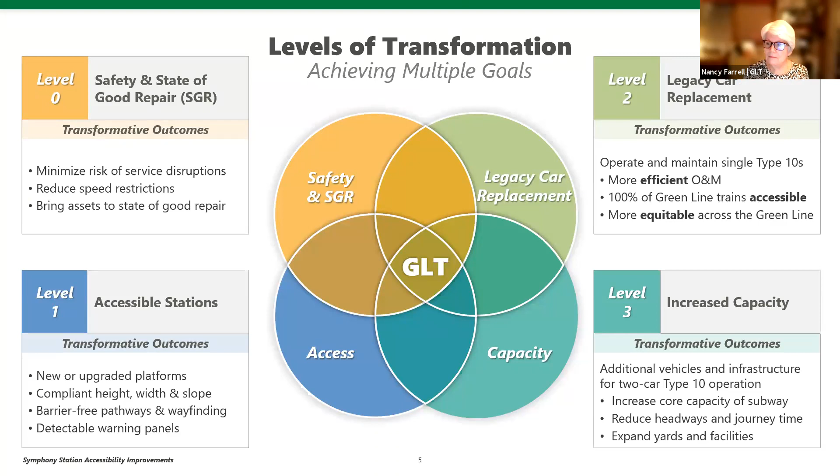On behalf of the entire Green Line Transformation team, I want to thank you for joining us tonight. I'm here with Desiree Patrice, Ben Friesen, and Andres Achury from the GLT senior staff and our project design team. And like Nancy said, we're very excited to share with you the 100% design plans for upgrading and modernizing Symphony Station to make it fully accessible.

The Symphony Station project will not only improve accessibility and safety for all riders, but will also improve the overall quality of service. From our engagement with stakeholders throughout the design process, we know the neighbors and community members around Symphony Station are eager to see this project executed. So before we get started with the project design, I would like to take a few minutes to highlight how the Symphony Station Accessibility Improvements Project advances the goals of the Green Line transformation.

Safety and state of good repair, accessibility, legacy car replacement, and increased capacity are the 4 key elements of the holistic objectives of the program. So you may be asking yourself where we are with each of these levels that I'm describing. It is important to note that the levels advance concurrently and are interrelated.

So let me give you an example. Much of the state of good repair and accessibility work that we are advancing right now will lay the foundation for a unified fleet of vehicles and increased capacity in the future. So this level is critical to safety and reliability for riders today and the years to come.

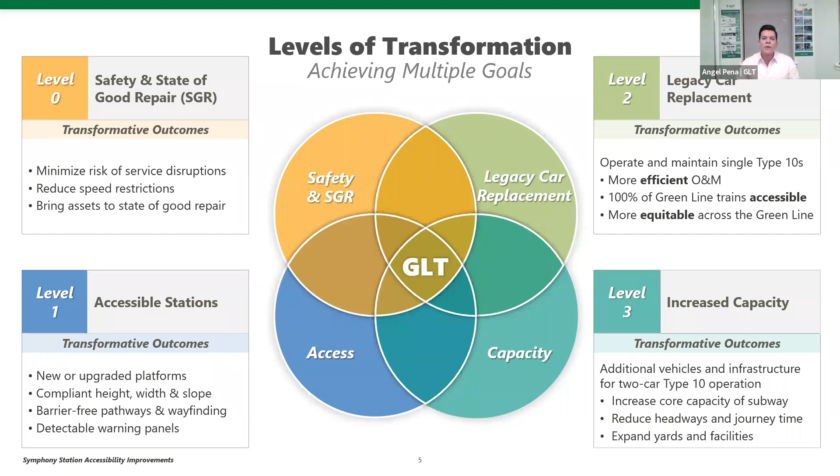So through our accelerated approach, we have delivered major improvements across all Green Line branches over the last 2 years. Some of those is that we have been able to renew 10 miles of track, which represents 20% of the entire Green Line system. We also have upgraded 18 intersections, replaced 20 units of special track work.

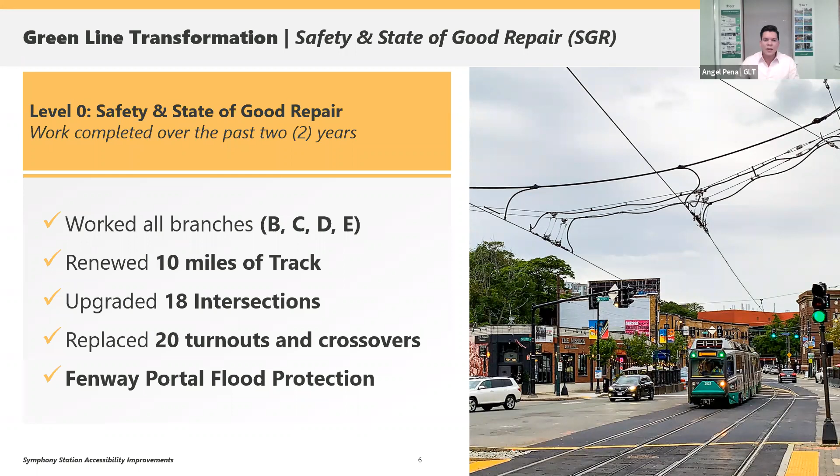And completed the Fenway Portal project to improve the resiliency on the D branch. So there's a lot of work in a short time frame. And these upgrades make the system safer, provides a smoother ride, and increase accessibility for pedestrians, cyclists, and riders of all abilities. But there's much more.

Beyond these state of good repair investments, we are focused today on making the system fully accessible. Over the next 5 years, we're making more than 20 Green Line stations accessible. That includes Symphony Station. Before I get you there, first, let me tell you some of those.

We have accelerated construction on the B branch consolidation, for example, by using the full access closure earlier this year. And now we are on track to open 2 new fully accessible stations by the end of this year, months ahead of schedule. At the same time, we're now working with the town of Brookline to reopen the new accessible Brookline Hills Station this winter as well.

So we're working on many also accessible designs for more to come. Some of that is Newton Highlands, Hynes, and the 4 remaining inaccessible stations on the D branch, which are Beaconsfield, Chestnut Hill, Eliot, and Waban, making the D branch the first fully accessible Green Line branch. So that's very exciting to us.

And we have many other exciting projects going on, but today we're here to discuss the fully funded Symphony Station. So let's learn more about it with the team.

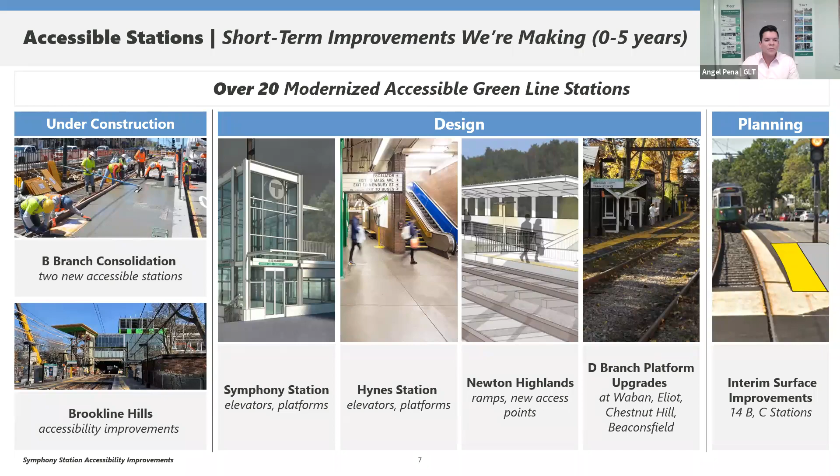Symphony Station is the last underground station before the E branch transitions to surface level and sits below the busy intersection of Massachusetts Avenue and Huntington Avenue in Boston. The station was constructed in the 1940s, and the station's platforms are separated by the Huntington Avenue underpass. The station currently lacks 2 major elements of an accessible step-free journey: elevator access and raised platforms for accessible boarding.

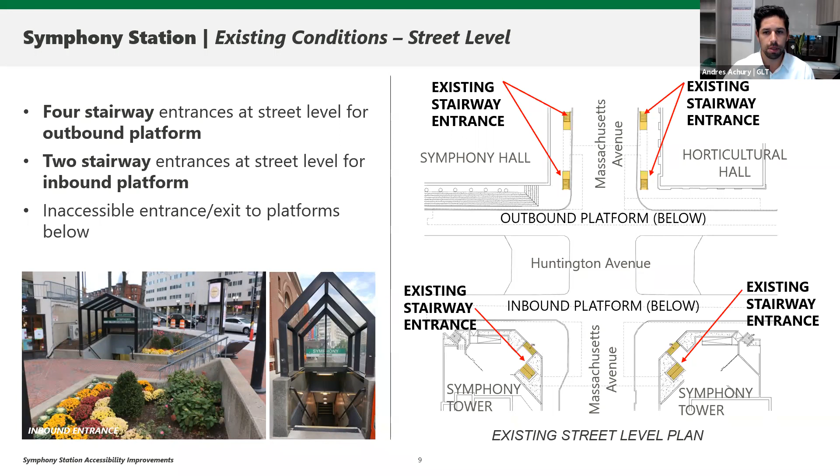The station has 6 narrow staircases leading from the street level. These stairs are a hindrance for all riders and specifically impact senior citizens living at the Symphony Towers, who must navigate a series of ramps and staircases before entering the platform.

Upon reaching the platform, riders must step up into the train. The platforms are too low to support the ramps that deploy from our Type 8 and Type 9 trolleys. In addition, the station lacks emergency egress. There are no functioning restrooms at either platform. The architectural finishes, lighting, ventilation, security, and safety systems also need to be upgraded.

The new station design is remedying many of these flaws and improving other aspects of the rider's experience in one of the busiest stations of the Green Line.

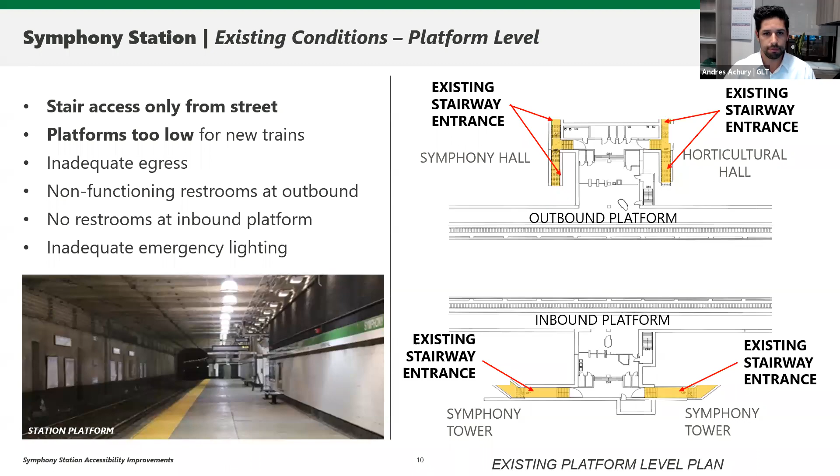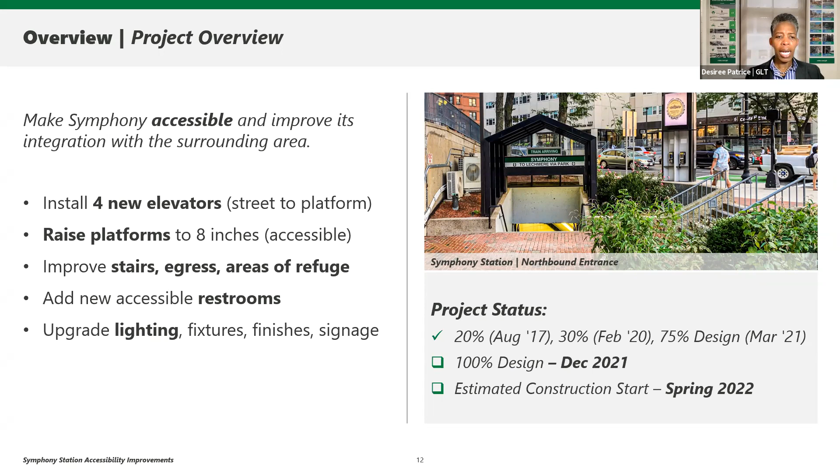Since 2017, the MBTA has continually engaged with stakeholders to reach design milestones of 30, 75, and 100%. As a result of these efforts, the new station features 4 new elevators, raised platforms, improved stairways, new areas of refuge, or what is referred to as the area of safety, new accessible restrooms, and other additional station upgrades.

At surface level, the new head houses for the elevators will connect all 4 corners of the intersection to the platform level. Each of the 4 new elevators, 2 on the north side and 2 on the south side of the Tower Plaza, functions independently within their own hoistways and machine rooms. This means if one elevator is out of service for maintenance or repair, the other 3 are not affected.

The elevators will be on call, meaning riders will need to push the button to call the elevator by selecting an up or down. Each floor button will light up when pressed. Elevator buttons will be constantly backlit. The elevators will be constructed in well-lit areas within the general circulation of the station. Buttons will be placed inside and outside of the elevator cab in compliance with ADA guidelines, with wider braille plates.

With stakeholders' feedback from the 75% design, the head house renderings are updated to better represent the final construction and its relationship to the surrounding area. The head houses are constructed of glass for visibility through the shafts and to minimize the impacts to the surrounding businesses. The pathways between the head houses and the adjacent buildings provide at least 6 feet, 8 inches of clearance, and all traveling surfaces around the head houses and plaza will be concrete, with the exception of the area between the new outbound emergency egress stair and the horticultural hall.

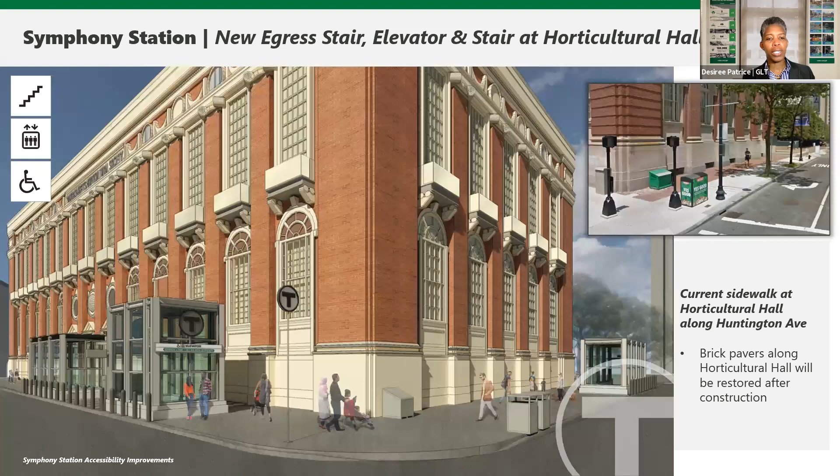This area is privately owned and will be restored to the existing condition by installing wire-cut brick pavers after the head house is constructed. We will also be relocating the signal box on Mass Avenue to Huntington to reduce the congestion on the sidewalks. We have also coordinated with the Historical Commission to ensure the design does not impact the historical nature of the surrounding buildings.

The two 3-stop elevators shown in the rendering establish direct connections to the entrance level of the Symphony Towers, east and west, to better facilitate travel by residents.

The current lower brick levels of both Symphony Tower plazas will be replaced with concrete, and there will be two new accessible ramps to the lower plaza. Ownership of both plazas will not change with the redesign.

We will also install new bike racks outside each head house for rider convenience. The design also incorporates head houses for stairwells that provide protection from inclement weather.

Along with our partners at the City of Boston, we'll also ensure that all accessible paths remain clear of snow to allow access to the station.

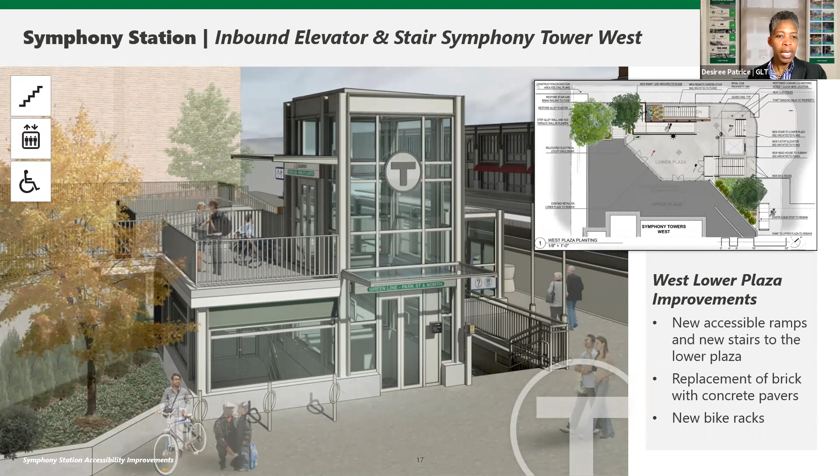Elevators and head houses will be protected from the roadway by removable bollards. The bollards will be located along the driveway next to the Christian Science Center, protecting those exiting the emergency egress.

Bollards will also be used to maintain clearance between the sidewalk and the roadway with existing bike lanes along Mass Ave. The design of the station will not preclude future roadway or bike lane redesign by the city of Boston.

So let's now look at the path of travel once the new elevators are installed and the station is reopened.

First, the presence of an elevator head house on each corner of the intersection, each with a large T logo, will make it very clear to pedestrians in the Arts District where the T station is.

However, know that the tracks will remain separated underground with no mezzanine due to the presence of the Huntington underpass for cars and trucks, as shown in the middle.

You may have to cross the street to access the correct elevator using the flat, signalized pedestrian crosswalk across Huntington Ave. The distance to cross from one elevator at street level to the opposite elevator is about 170 feet total.

After taking the elevator down from the surface to the lobby, it's about 30 feet to the fare gates along a flat, level surface, and then an additional 25 feet to the station platform.

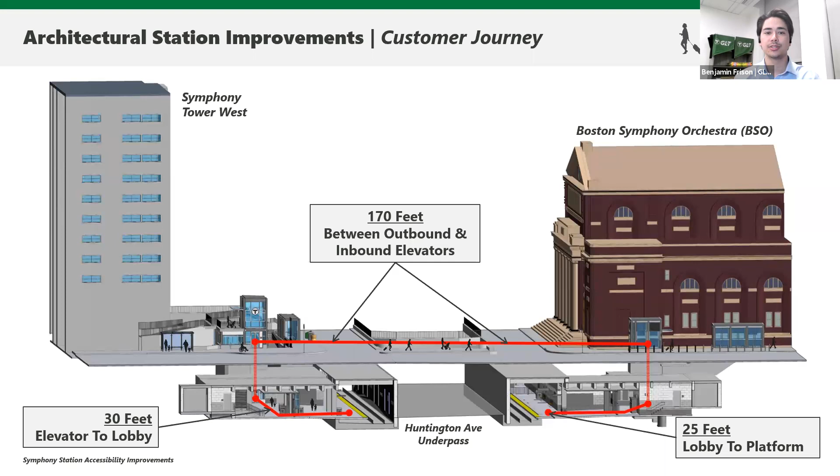Here's another view of the inbound lobby, right next to the fare gates. As stated earlier, the elevators are about 30 feet from the entrance to the large accessible fare gates.

In coordination with the agency-wide fare transformation program, an updated fare gate system will be implemented post-construction. We're also working with the MBTA's Customer Technology (CTD) department to pilot pre-fare screens, real-time dedicated screens located in the station lobby.

The station will have two entrances with new wayfinding, including Braille signage that will be clear and easy to locate throughout the station.

New station amenities will also include upgraded lighting, improved interior finishes, countdown clocks, and a new public address system. Placing artwork throughout the station is also under consideration.

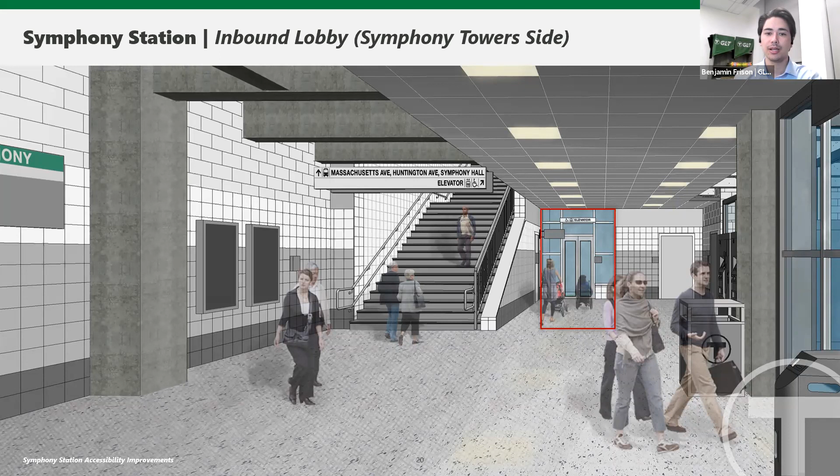Renovated stairways and new emergency exit stairs will be marked with high contrast for improved visibility and safety. We view this project as not only an accessibility upgrade, but an entire remodeling of the interior space of the station.

So now let's take a look at the entrances and the platforms. The platforms will be more than 225 feet long, which is enough to support longer trains in the future.

The entirety of the length will be lined with yellow tactile warning strips. In the event of an emergency, a fully loaded train could safely be unloaded and dispersed, with passengers in the area using the area of refuge and emergency egress stairs.

Accessible ADA restrooms will be equipped with push-button doors, providing hands-free access. As a safety measure, individuals needing to access these restrooms will need to contact the customer service attendant, either in person or via a call box.

We will also make upgrades to the fire alarm and other life safety systems, including surveillance cameras throughout the station.

Finally, similar to Government Center, areas of refuge will be constructed adjacent to each elevator. These are pressurized areas to be utilized in the event of a fire or emergency. So, these are exciting improvements to the station, but it will take time and coordination to deliver.

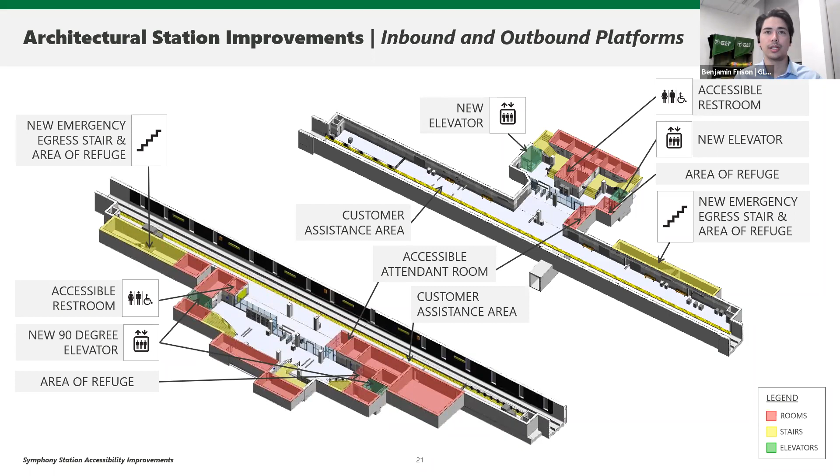Let's now discuss the construction impacts. We have explored two potential approaches to construction: a traditional approach and an accelerated approach.

The traditional approach will keep Symphony Station open during weekday hours. Starting in 2022, one year of nighttime utility work will be followed by three years of early nights and weekends, with the project being complete in early 2026.

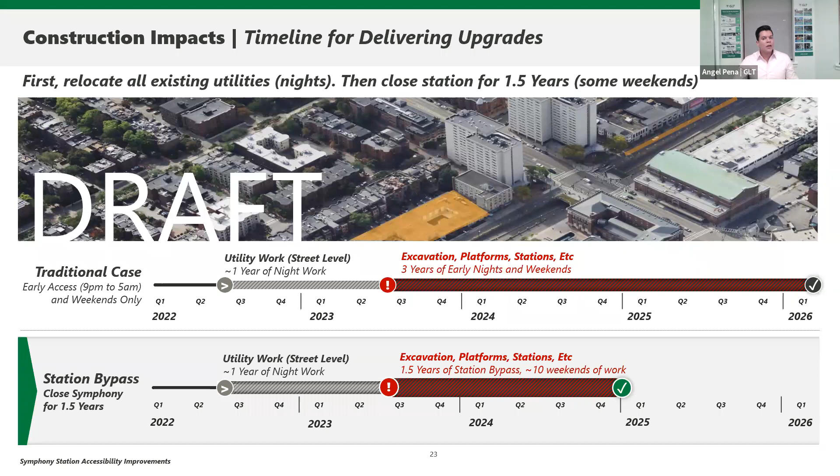However, if we accelerate this, one year of utility work will be followed by a station closure for just 1.5 years, getting the completion of Symphony in early 2025, a savings of more than a year. Although Symphony will remain closed, E-branch trains will continue to pass through the station.

So what are the benefits and drawbacks of each of these methods? With the traditional method, the station will remain open. However, the project will take longer to complete, and each day we close service, the entire branch will be impacted.

With the accelerated approach, Symphony Station will remain closed. We're going to be able to reduce the construction timeline, reduce costs for busing, and bring back service much sooner.

So after taking all factors into consideration, we are deciding to move forward with the accelerated approach. This means utility work will be in summer 2022 and will last for one year. The construction of the station will begin in summer 2023, and this is when we will close the station for 1.5 years until completion in early 2025.

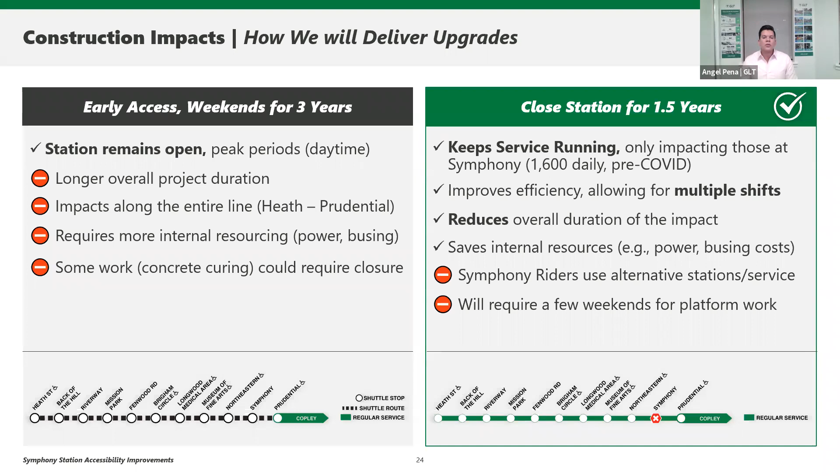As with any construction, the development at Symphony Station will be disruptive to this area. That's why it is a priority for us to maintain access and reduce noise during construction.

To maintain access, we will use steel plates with non-slip surfaces so pedestrians and vehicles can move around the area. For cyclists, bike lanes on Mass Ave will be shifted inward along with vehicle lanes. For drivers, we will coordinate with the police department to help manage traffic throughout the area.

Also, to reduce noise and excavation impacts, we will use drill piles instead of noisy pile-driven equipment for excavation. Vibration sensors will also be installed at adjacent buildings to monitor vibration levels through the soil.

When installing the elevators, for example, crews will work day shifts to limit overnight work. Other measures will be taken, such as sound barriers, to further mitigate the noise. And we will continue to coordinate around major events, as you've seen in the past, to minimize disruption.

Once the station is under construction, we will ensure riders are able to reach their destination by providing alternative service.

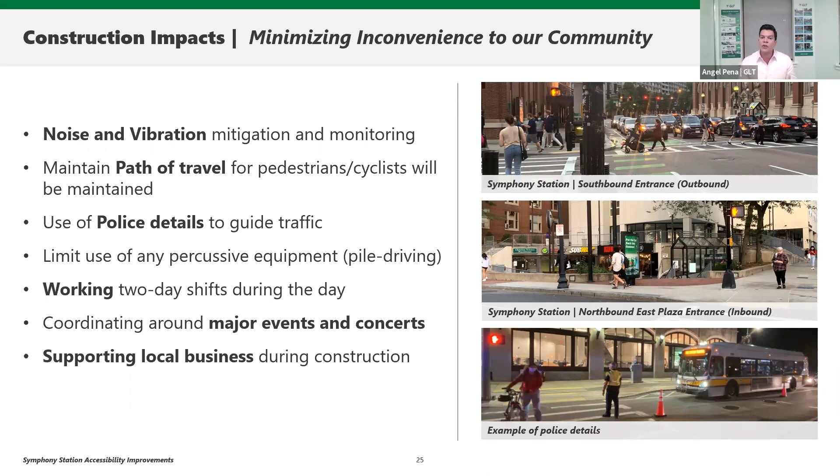Accessible shuttles will be on site and operate from Prudential, Symphony, and Northeastern stations. To better understand this, when a rider arrives at Prudential, a shuttle will be available to provide transportation to Symphony Station. The same will occur for passengers traveling from Northeastern.

Transit ambassadors will assist with accessible vans as needed throughout construction. Route 39 buses will be available and enhanced along Huntington Ave between Forest Hills and Back Bay stations. Our field staff will monitor crowding and overall ridership to adjust bus counts to meet riders' needs.

Last but not least, as we get closer to construction, we'll be communicating any shift in bus stop locations, making sure they're clear and marked. I want to assure you that once we start construction, our priority is to further minimize disruption and finish the job as quickly and safely as possible.

So looking ahead, what are the next steps? We will be finishing the design, selecting a builder, and then starting utility work next year.

Once the builder is selected, we will have another public meeting well before construction to give you more detail on the construction process, the logistics, such as mobilization of crews, location of the field office, and much more.

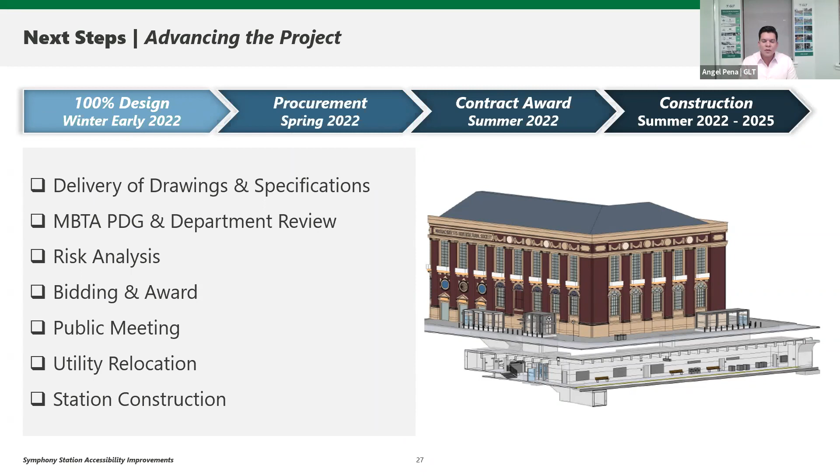I would also like to take some time to discuss how we're going to keep you informed on our progress. Public engagement and transparency is very important to us.

This is why we have been working closely with many stakeholders, such as the Disabilities Commission, BSO, MASCO, Northeastern, Symphony Towers, RTAC, and the MBTA plaintiffs group, and we will continue to do so as the project progresses.

We will continue to host stakeholder briefings as we finalize the design and prepare to begin construction. We have also begun outreach around Symphony Station and have distributed flyers to members of the local community within a quarter mile radius.

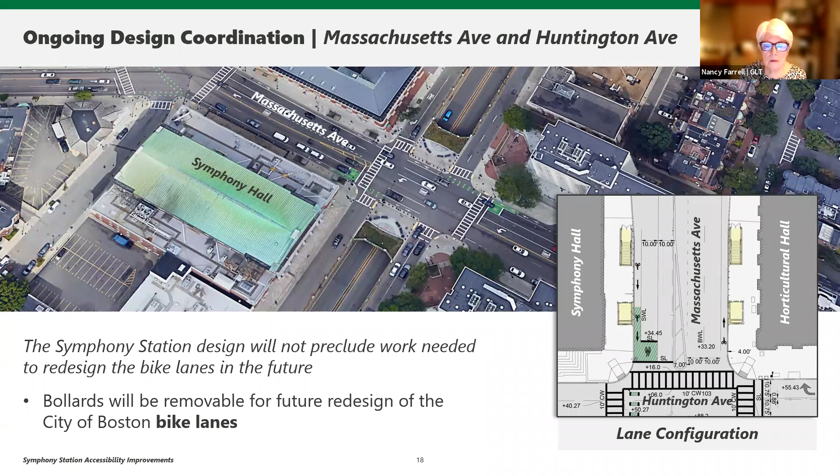Yes, thank you so much, Nancy. And yes, I am here on behalf of Senator Brownsberger. He wasn't able to make it tonight, but I'm glad to be here and to learn about all of the designs for this project. Transportation is one of our biggest priorities, and I'm glad to see the thoughtfulness on this project. So thank you all for your work on it. I know we are regularly hearing from residents in this area about accessibility at the station, so I know it is a welcomed project by many in the area. Thank you so much for your work.

And I also want to express our support for improvements to the bike lane. Obviously, the senator is a large biker himself, he bikes almost everywhere, and I do myself as well. I have personal experience in this area and know that the improvements to the bike lanes would be a huge public good. So we hope that we can be a part of whatever conversations continue on that matter, and that we can be helpful in whatever ways possible. Thank you so much.

Great, thank you. We always appreciate Senator Brownsberger's participation because he's always committed to these issues. So it's great for us.

Thank you very much. I'm going to go to the Q&A for a couple minutes because we have some questions. Marie is asking, from a previous meeting she attended, she thought that artwork was being implemented by the MBTA in the form of murals. She wants to know if that was a mistake, or if there is more potential for art. She would like to hear about that. And I can't remember who mentioned art.

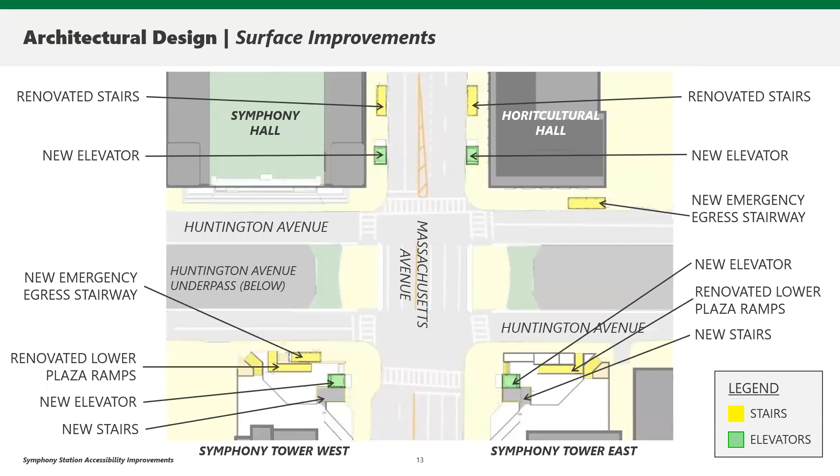David says thanks for answering his questions. You're welcome, David. Dennis has a question about the buttons: I need the buttons on the outside of the elevator flush with the elevator facade. When the buttons are indented, I cannot reach them, and when in the elevator I can barely reach the buttons. Why can't the MBTA make all the elevators either go up or down automatically once the elevator has been called? If I am at street level and hit the button, why do I need to push more buttons once inside? It would make life so much easier if it would go straight down.

The buttons are of great importance, but I know that one of these elevators stops at two locations, so that may not work. We need to address this question in more detail. Desiree, Ben, who would be able to answer this? Nancy, I'll defer to Judd for more detailed answer. Okay, Judd?

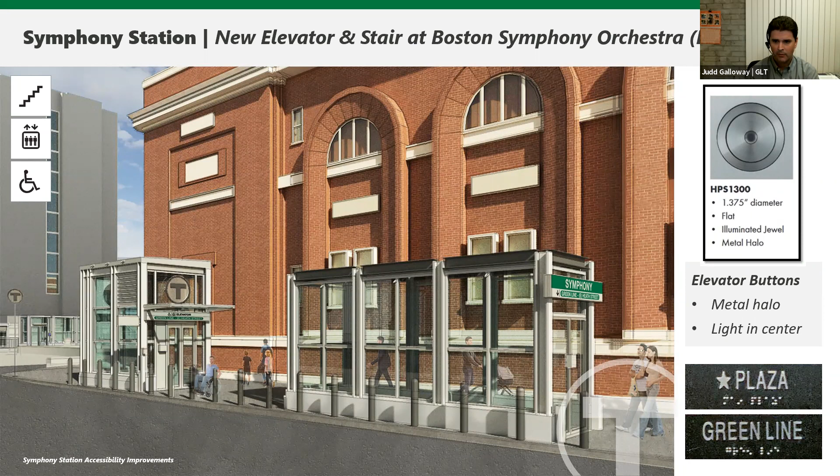Yes, the elevator buttons are flush mounted on the outside of the elevator, as you can see here. This is a good slide that demonstrates the MBTA standard button. It's center lit and within ADA accessibility reach requirements. We do have a two-stop elevator here. The question of being able to go up and down automatically without having to push a button has not come up before, so we can review and consider that. On the south side of Huntington Ave, where we have a three-stop elevator, that probably would not be possible.

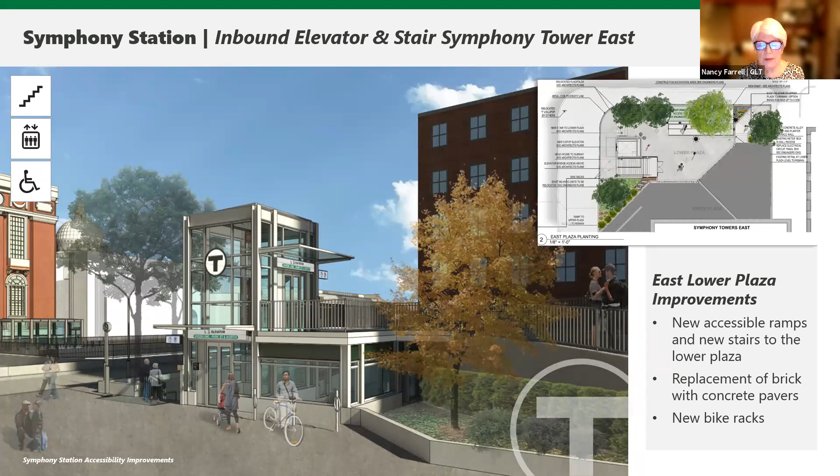It was a terrific presentation, I'm excited to get these accessible. I live in the area, a couple of blocks away, and I wanted to reiterate what Councilor Bok and a few other people had brought up about the bike lanes. From what I understand, the curbs are being moved anyway. It is such a dangerous area, people are pulling over all the time, that's why you have the bollards, as Kenzie Bok had mentioned. So I would ask that a raised, separated bike lane be incorporated into this really dangerous area. It would make a huge difference. I know it's a pinch point for the whole Mass Ave, and that makes it even more important for safety. All right, thanks, we're going to put that on the list for sure.

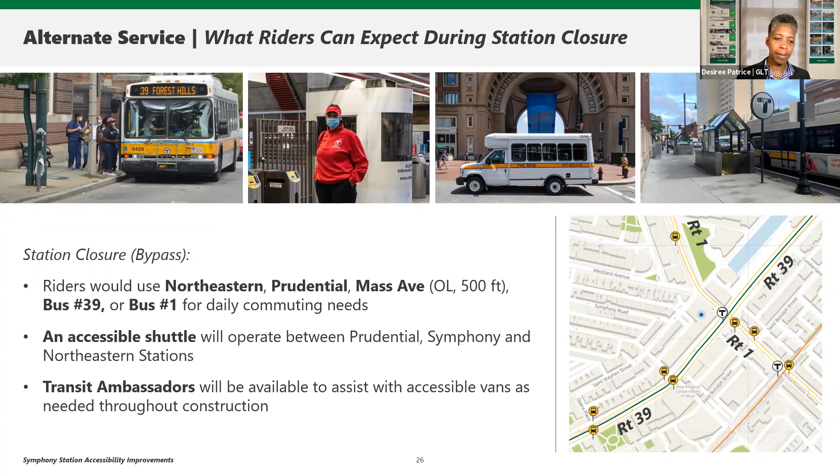Yes, Desiree and Allison, great questions here. So we've been working with both of the project teams working on two different projects along Huntington Avenue. These are classified as transit-oriented development projects because they have the possibility of impacting the tracks if they're doing subsurface work. So we've been in close coordination with both of these projects to ensure that we limit the disruption to the neighborhoods and to the riders in general.

I think on a positive note, once all three of these projects complete, you're going to have a very revitalized district at that intersection, a little bit inbound and outbound of it as well. And I'm looking forward to it because I actually live close by in the neighborhood as well.

So Ben, here's a related question. What is the plan for rat mitigation during construction so the surrounding businesses aren't impacted? This is a problem in the city with every single project, and I know the MBTA has policies to address it, but perhaps you could just speak to it.

Yeah, I can speak to it generally. So with our experience completing track work projects, including the D branch track and signal project, as well as the previous work on the E branch, including this year and last year, we've been very aggressive as far as tackling the rat problem.

So we have consistent inspections around the problem areas, and we check in weekly to make sure that the traps are in the proper locations. If they need more traps, we add more traps as necessary. Once we get closer to the actual construction date, we'll have a good plan to address that. But in general, we are aware of that issue, and we've been addressing it in our previous endeavors.